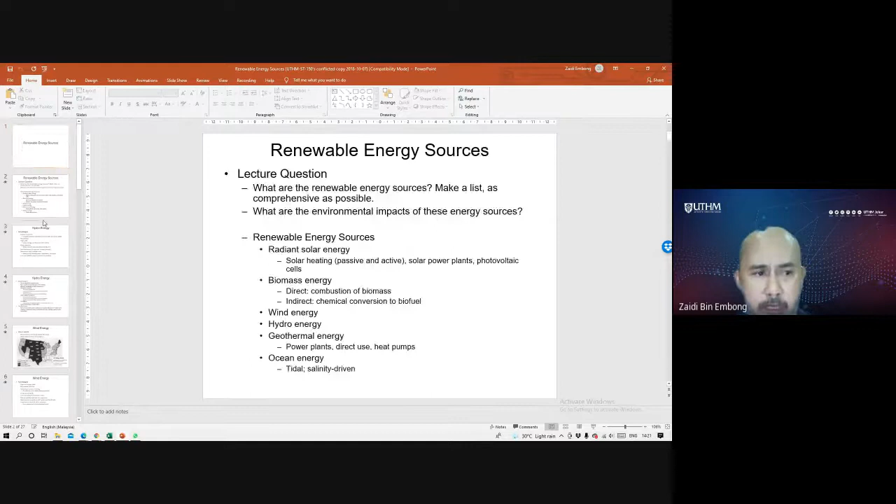Okay, all right, so look at our previous topic on renewable energy resources. I think I've explained to all of you the kinds of energy that we have, right? We have hydro energy, wind energy, and also biomass.

Some of you asked me about biomass. What is biomass? Biomass is from living forms, from dead living forms or dead biological material. So we can use it after this material decays, then we can use it as biomass. There is a term we call biofuel. For further detail, you can read the notes here.

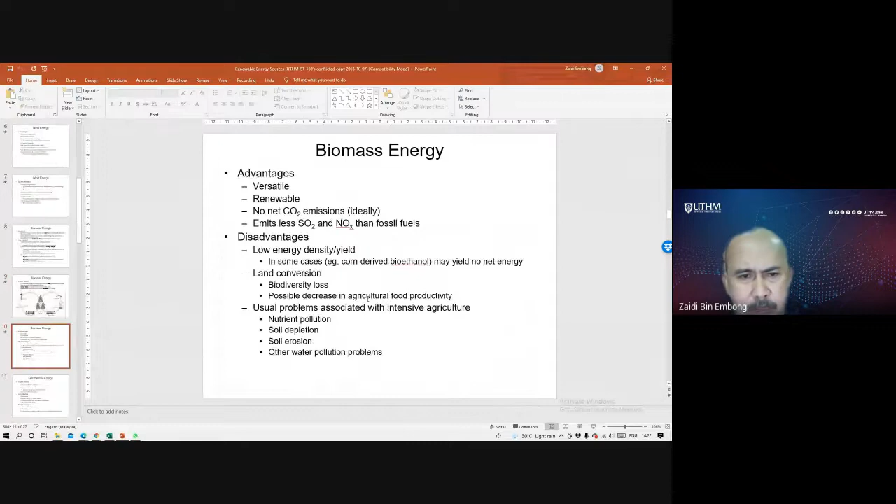I will upload the notes later on, don't worry. Okay, this is the cycle of biomass, for example, you can have a look later on. And then I've explained to you about geothermal energy before. This is solar energy, solar panel energy. And then we come to hydrogen power, all these things.

Now our major concern is, okay, we already know about all these kinds of renewable energy. When we talk about energy, we have to notice that there is non-renewable energy together with renewable energy. I explained to you the percentage of the non-renewable and renewable energy.

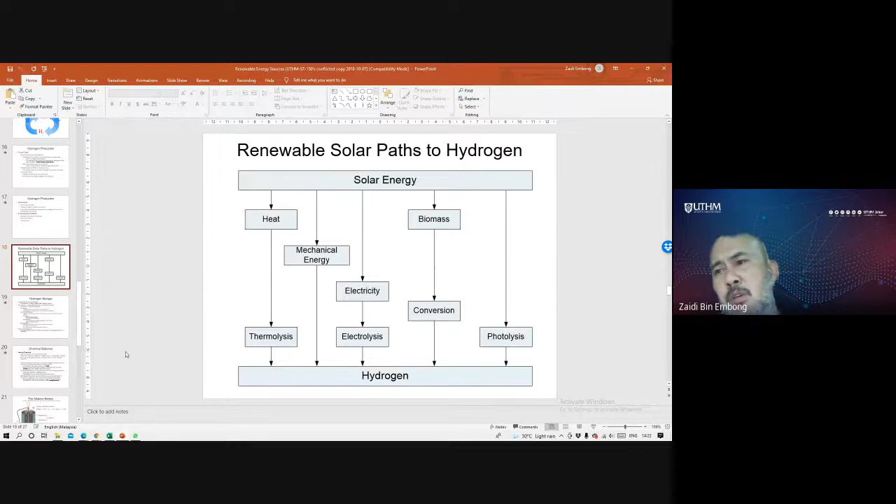Now the major concern is how can we store the energy? We have energy from all these resources, from biomass, from solar panel, from geothermal. But the major concern now is how can we store the energy? So we can store the energy using a battery.

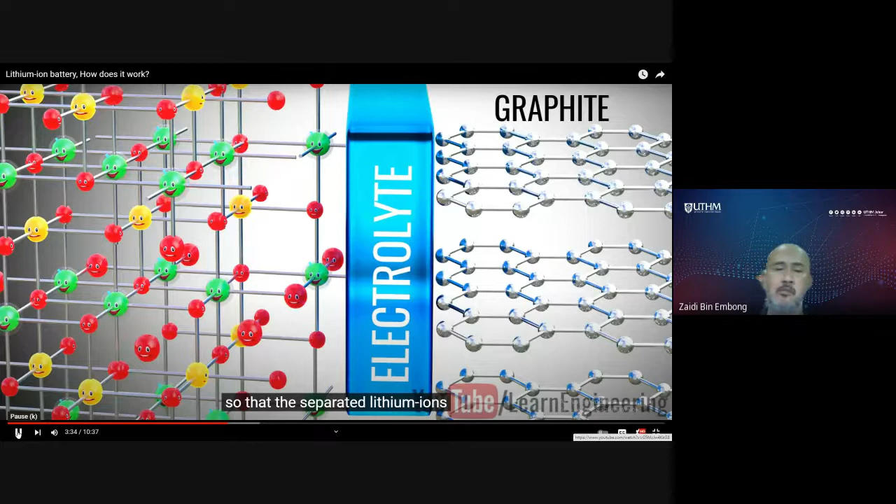Now let's see what happens when you connect a power source. Okay, this is an overview of the battery. We have the separator, and then we have this part and this part. Okay, across this arrangement.

The positive side of the power source will attract and remove electrons from the lithium atoms of the metal oxide. These electrons flow through the external circuit, since they cannot flow through the electrolyte, and reach the graphite layer. Meanwhile, the positively charged lithium ions will be attracted towards the negative terminal and will flow through the electrolyte, reaching the graphite layer space and getting trapped there.

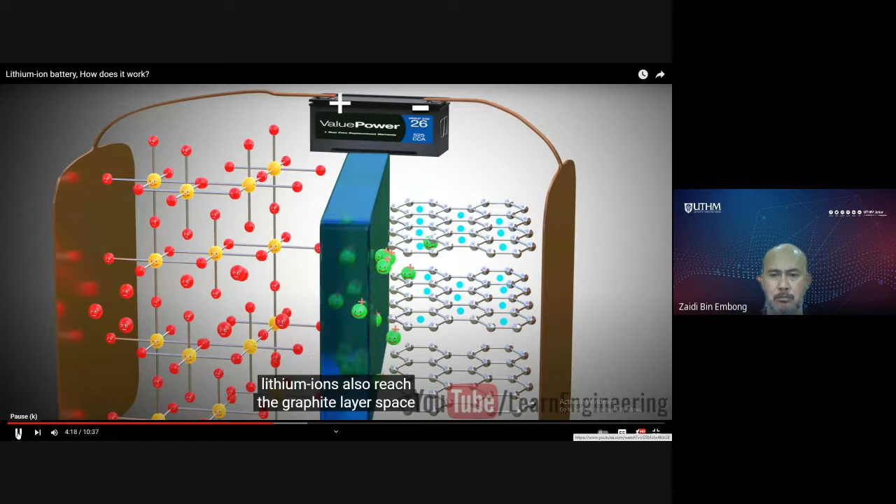Once all the lithium atoms reach the graphite sheet, the cell is fully charged. Thus we have achieved the first objective. This is condition one, after the battery is fully charged. All the positive ions from here will migrate to here, this part. So this is what you call the fully charged condition, which is when the lithium ions and electrons are detached from the metal oxide.

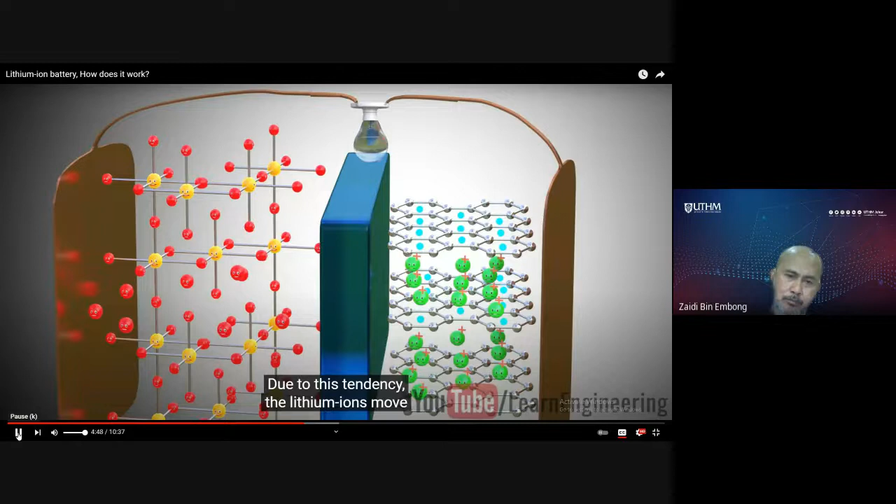As discussed, this is an unstable state, as if being perched on top of a hill. As soon as the power source is removed and a load is connected, the lithium ions want to go back to their stable state as part of the metal oxide. Due to this tendency, the lithium ions move through the electrolyte and electrons via the load, just like sliding down a hill. Thus we get an electrical current through the load.

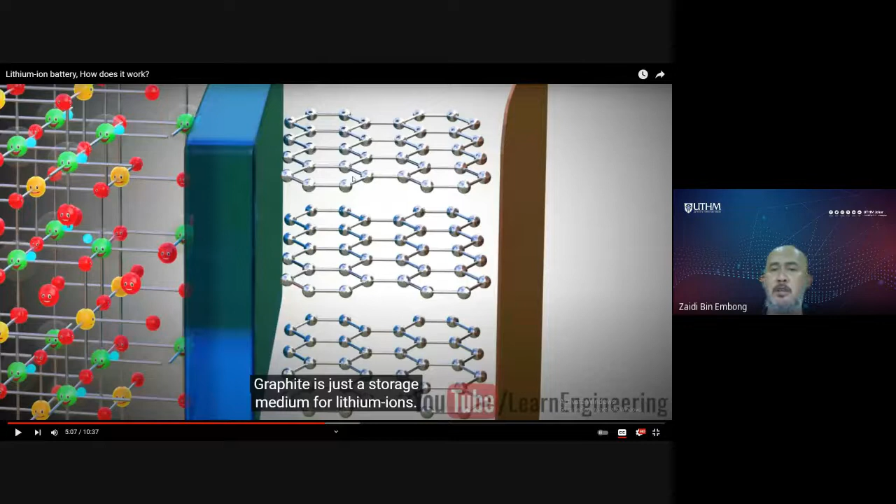Please note that graphite does not have a role in the chemical reaction of the lithium ion cells. Graphite is just a storage medium for lithium ions. What is the function of graphite? Graphite is there in order to store, the medium of lithium ion, that's it. So it means all the lithium ions will stay or remain over here, stored here.

Even though the SEI layer was an accidental discovery, with over two decades of research and development, scientists have optimized the thickness and chemistry of the SEI layer for maximum cell performance.

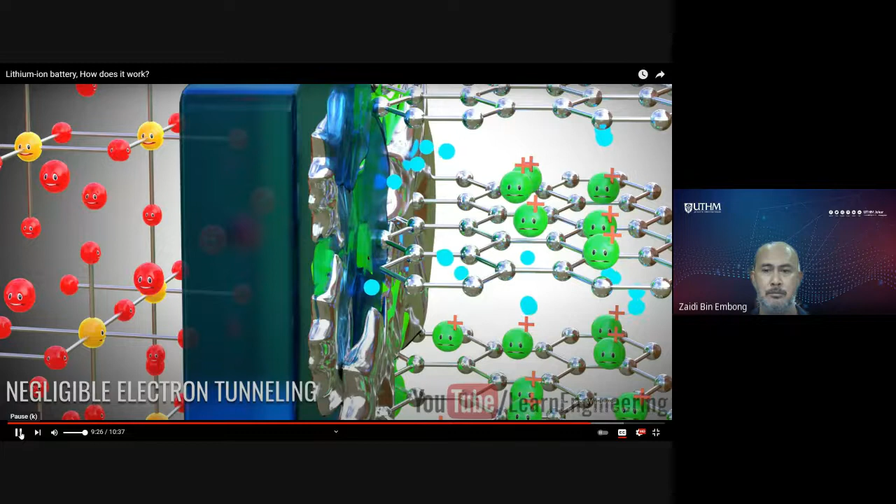The battery and so on. So at least you have some idea what this battery is all about. By that we can see many components of the battery. So therefore, today's lecture we will focus on this topic, which is the topic of energy storage.

So we're talking about thermal conductivity, the insulator application to energy conservation. In this context, in the battery, we have the conductive material, we have the insulator material. And also from the video just now, you heard the word heat. The heat is thermal. So before we start, we need to know about the energy transmission mode.

Normally the heat can be transferred in a medium, in the liquid medium, solid medium, or gaseous medium. The heat can be transferred by three kinds of events, which are number one, conduction; number two, convection; and the last one, radiation. Or maybe a combination of all three.

Conduction is normally when there is energy transfer, heat transfer, in solid material. Convection is normally when there is heat transfer in liquid form. For radiation, it's more related to air. Okay, right, let's look at the definition of conduction.

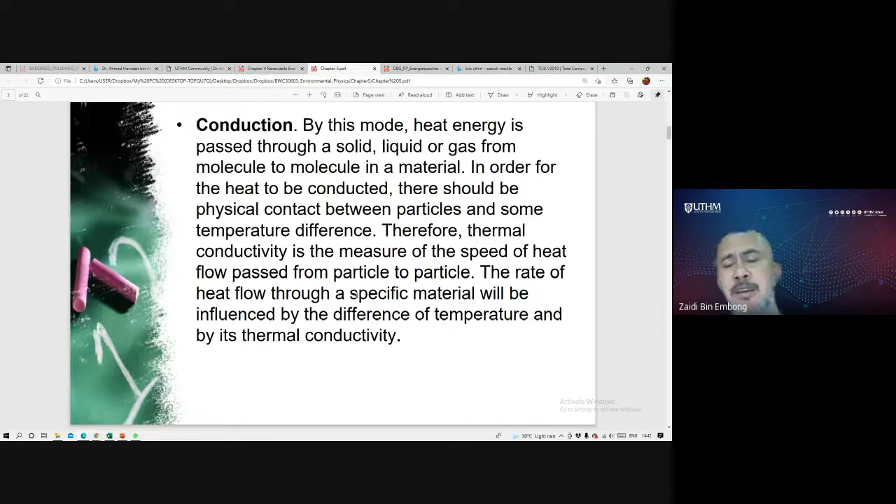So we have to look at what kind of material, sometimes we have materials like copper, zinc, etc. So the rate of the flow will depend on the heat and the material. And also there must be a difference in temperature.

So next we look at convection. Convection is more about heat transfer in the air or gases or liquid. This we call, for example, a microwave system, the microwave that you use in the kitchen. The heat transfer in the microwave system is via convection.

Last one is radiation. Radiation is more about energy transmission by the form of light, for example the heat that reaches the surface of Earth from the sun. Because we know that between the sun and Earth, we have a vacuum, the radiation, the heat from the sun reaches the surface of the Earth via irradiation, what they call electromagnetic radiation. So in this context, this kind of radiation we consider as light, because light is electromagnetic wave.

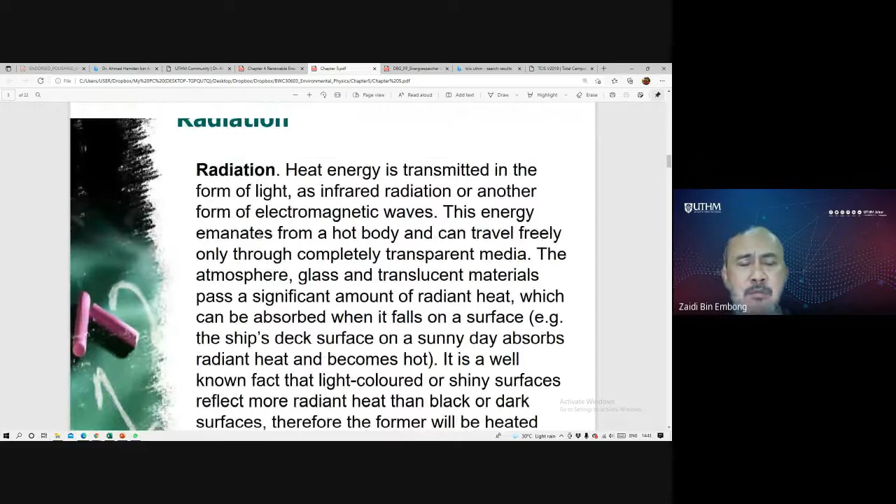Now, as we know, there are three kinds of heat transfer. Number one, conduction. Number two, convection. Last one is radiation.

Now we look at thermal conductivity and insulation. If you look at the battery system just now, we know that in the battery there must be a conductive material and there must be an insulator. So the thermal property of the insulator material or other common material is known, and can be measured - the amount of heat transmitted or flowed to any combined material can be calculated.

You can calculate it, and if you look at this, we focus on the term conductivity and insulation. Conductivity means the heat can pass through, while for insulation, the heat or the electric cannot pass through the material.

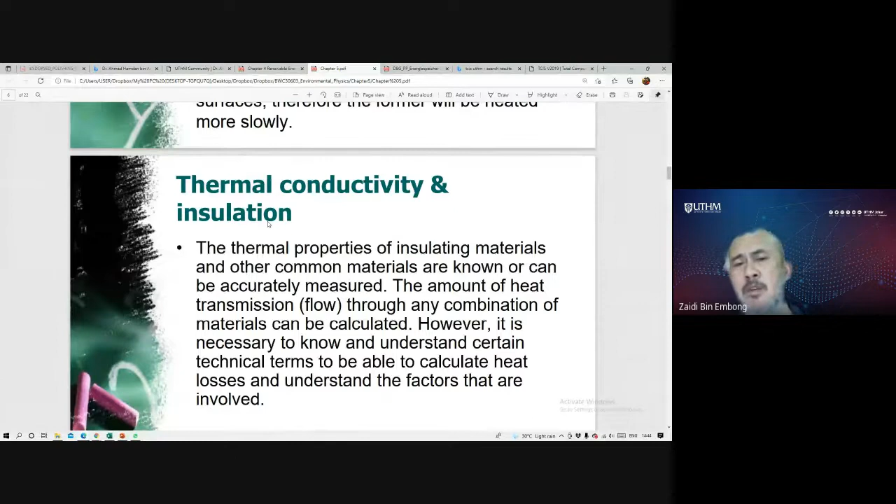So when we talk about thermal conductivity, we need to look at the term we call thermal conductivity, with the symbol K. This thermal conductivity is a property of material, or the ability of the material to conduct the heat or the electric. That's it. So this we call thermal conductivity.

If you deal with the electron, we say this is not thermal conductivity, but it's more electrical conductivity. Electrical conductivity means that the electron can be conducted via the material. But now as we mentioned, on the heat, therefore in this context we call it thermal conductivity.

So from here, for the thermal conductivity, we can use what we call Fourier law in order to calculate it. And the unit of thermal conductivity is measured in the unit of watt per Kelvin per meter, with the symbol W for watt, K-1 per Kelvin, and per meter. Per meter means this is the thickness of the material, represented by the thickness.

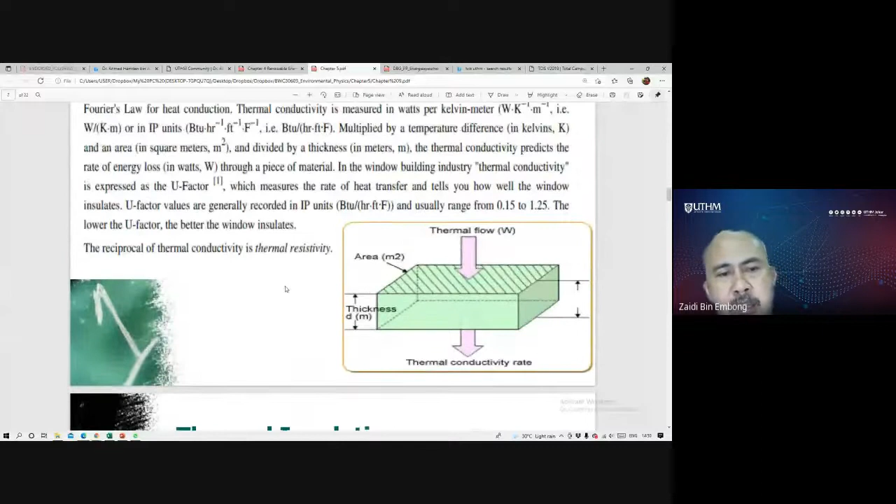Now we will talk about thermal insulator. Thermal insulator is the inverse of thermal conductivity. Thermal insulator means the reduction of heat transfer, meaning it stops or reduces the heat transfer.

So thermal insulation is the reduction of the transfer of thermal energy between objects of different temperature. We must notice the word 'different temperature' here is very important. The heat will be transferred as there is a difference in temperature — one part must be hot, another must be cold, and the objects must be in contact with each other, what we call thermal contact. So when two materials with different temperature are in contact, there will be a heat transfer, occurring from the hot area to the cold area, and at the end we have what we call thermal equilibrium.

Thermal equilibrium. So in this context, thermal insulator is also very important in order to avoid overheating. For example, look at the car engine — there must be a thermal insulator. That's why if you open the car boot and look at the engine, you can see some parts are metal, some parts are made from ceramic. Ceramic is a thermal insulator.

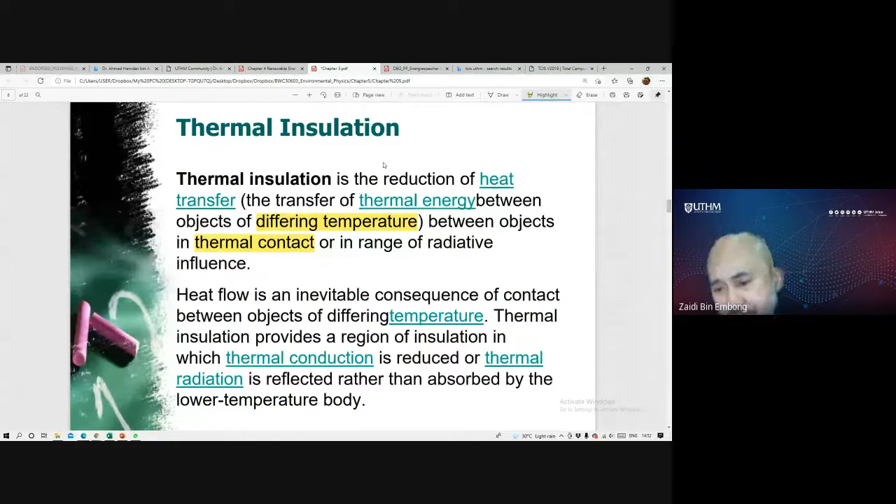When you talk about the insulator, insulating capability — this insulator is also very important in order to store energy. It's not only to avoid overheating, but the insulator is also capable of storing energy. I will explain to you later what it means by insulating capability or storing energy.

The insulating capability of the material is measured with the thermal conductivity, with the symbol K. Low thermal conductivity is equivalent to high insulation. This word is very important — don't ever confuse the term low thermal conductivity. It means that if the material has a very low conductivity, it has higher insulating capability.

Higher insulating means lower thermal conductivity. If you have high thermal conductivity, you have low insulating - it's reverse order. This word is very important: low thermal conductivity is equal to high insulating. Insulating here means represented by the value of R, the R value.

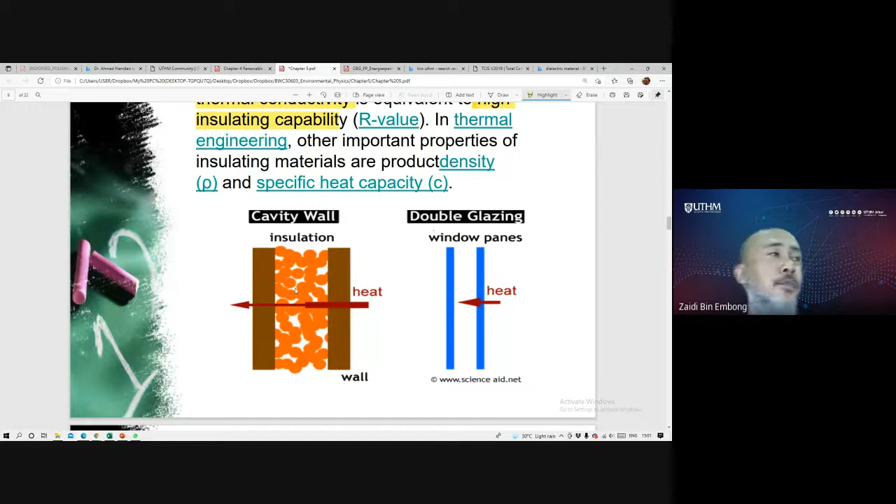The heat is also energy. That's why either it is thermal conductivity or electrical conductivity. But in our discussion here, we are concerned with thermal conductivity. Now this is an example, the double glazing.

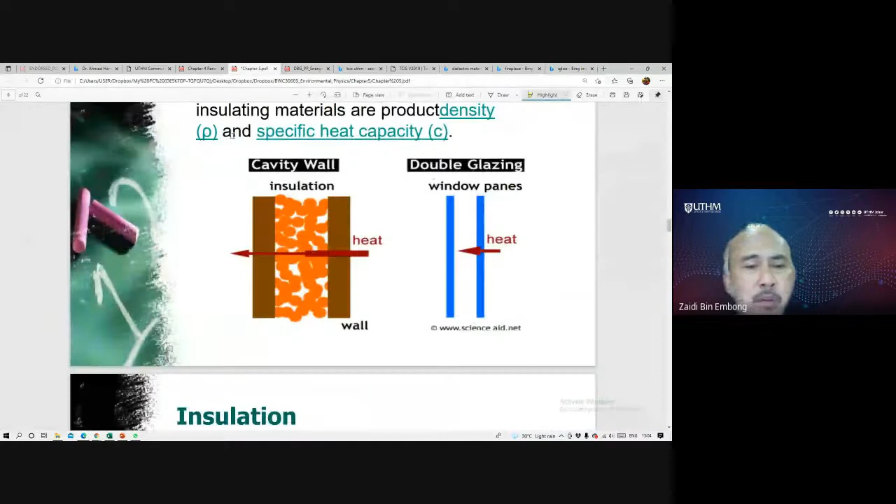Now we go to the next one: insulator. Insulator is very important in this context. The keyword here is low thermal conductivity, high insulator capability. Insulation means the material will not let heat or electric charge pass through it.

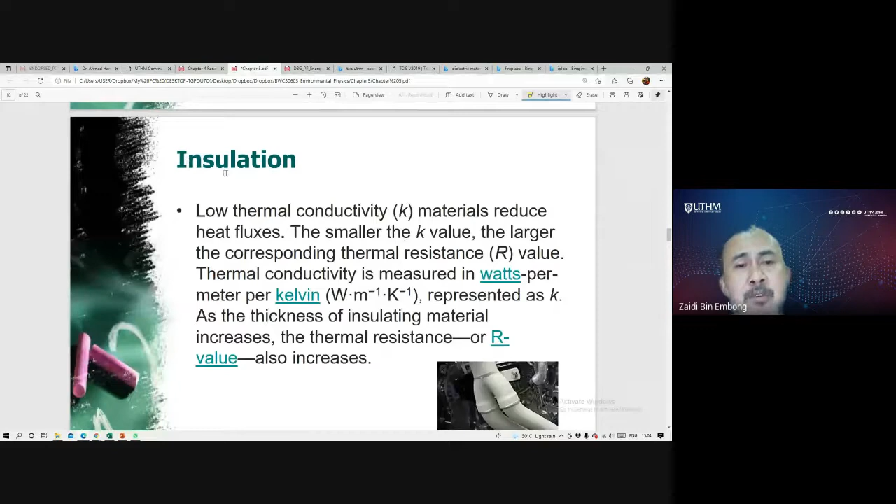If you look at the car exhaust part, for example, some part of it is covered by ceramic. The white colored part is a ceramic material.

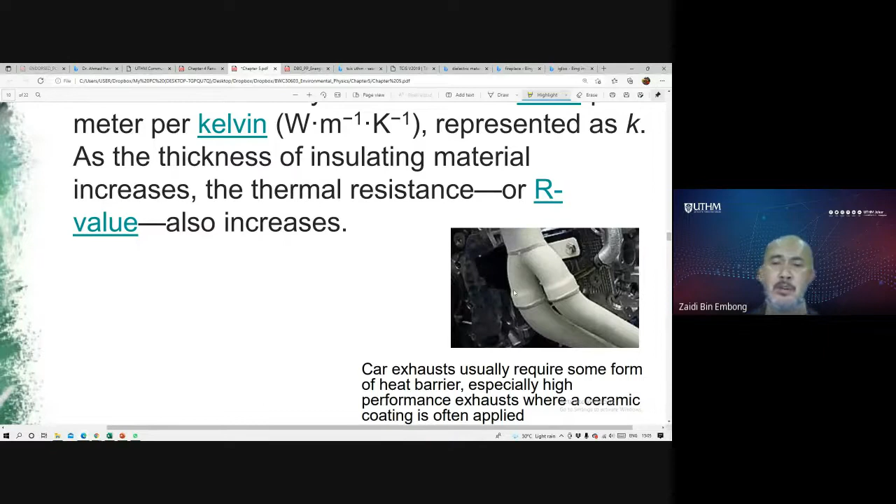You see the car engine - once the engine operates, the body of the engine becomes very hot. So in order to prevent the engine from contact with the car exhaust, we need to put an insulator, the white colored part. If there is vibration in the engine, the exhaust could vibrate and heat up with the body of the engine, and then the heat from the engine would be transferred to the car exhaust. In order to prevent this, we have to put a separator, what we call the insulator. Low thermal conductivity.

Insulator means low thermal conductivity, or maybe low electrical conductivity, which helps reduce the flux heat. The small k value - if the thermal conductivity has a small value, it means the thermal resistivity will be very high. In order to have higher thermal resistivity values of material, we need a smaller k value. So the property of conductivity must be as low as possible in order to have higher thermal resistivity. The thermal resistivity is measured using this unit, and the reverse order of the value is known as the R value.

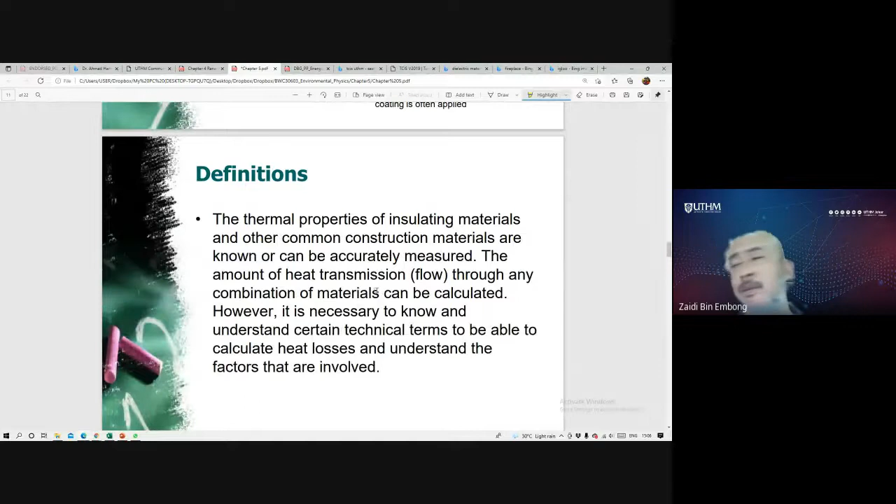Okay, some definitions. When we talk about heat, there are some parameters related to it. Number one, we have heat energy. What is heat energy? It's 1 kilocalorie, which is equivalent to 1,000 calories, or equivalent to approximately 4.18 kilojoules. Or you can use the British thermal unit, which we call BTU - British thermal unit. This is one of the fundamental properties of heat, talking about how much energy, the heat, that you can have.

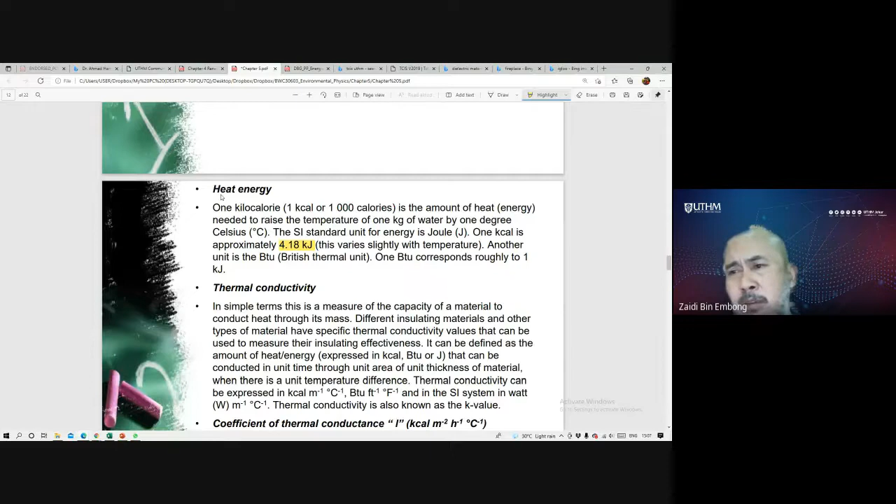Number two is thermal conductivity, as I mentioned just now. And then we have another one called thermal conductance. For thermal conductance, the symbol is I. Then we have thermal resistivity - as I said, thermal resistivity is the inverse order of thermal conductivity. Then the last one we have is called thermal heat transmission.

Any questions so far? Can you understand my lecture? No, doctor, okay right.

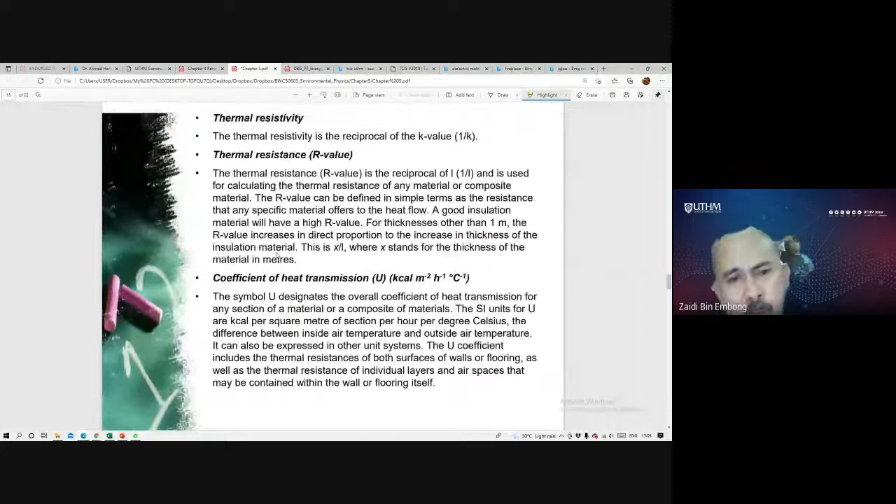All these are definitions, terms related to thermal properties. And then we have the permeance of water vapor, the resistance to water vapor. But the most important ones are the heat energy and the thermal conductivity, the coefficient of thermal conductivity.

And now, as I said, this is in the context of thermal. If you look at the context of the electrical part, it will all be different.

Now, why is insulator very important? This is the main crucial point, as I said. Insulator is very important. In a battery, insulator is very important. But if there is no insulator, the charge will be gone. That's why we need an insulator.

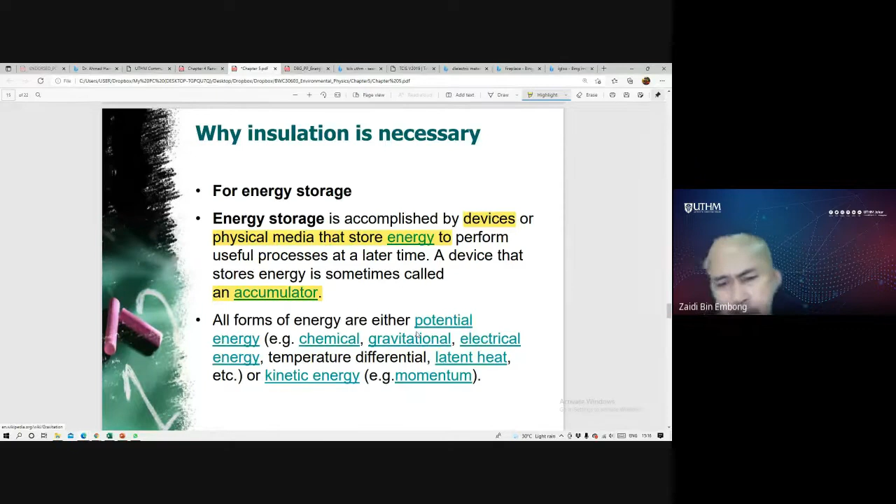When you talk about energy, there are many kinds of energy - potential energy, chemical energy, and so on. Some technology provides only short-term energy storage, and some other technology can be very long-term, like power to gas using hydrogen. Nowadays people talk about hydrogen technology, methane, and storage of heat and cold, and so on. It depends on the battery as well.

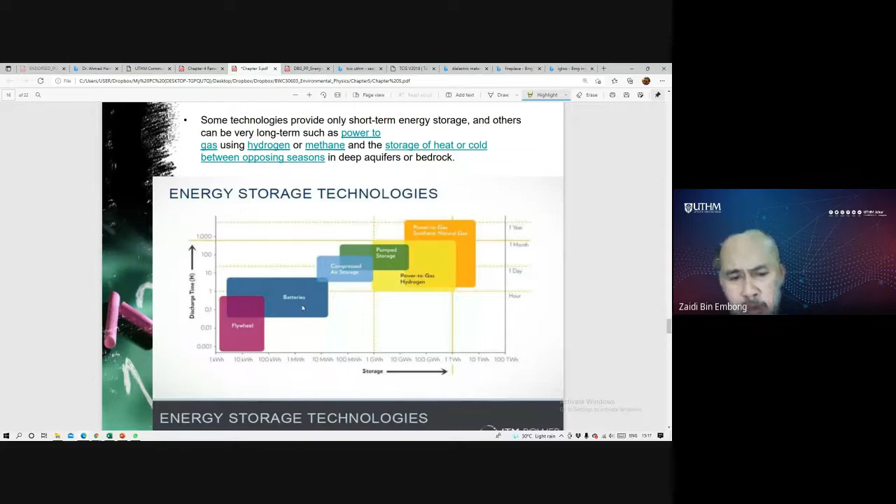If you look at the energy storage technology, you can see we have multiple techniques of energy storage. We start with flywheel - I can show you the video later on. The flywheel energy is more for mechanical energy. For mechanical, it will be more the flywheel. Then we have the battery.

The flywheel can store in this range up to this range. For the battery, it can store from here to here. Even the charging time and discharge time, you can see which one is fast - discharge time increases as we move from here to here.

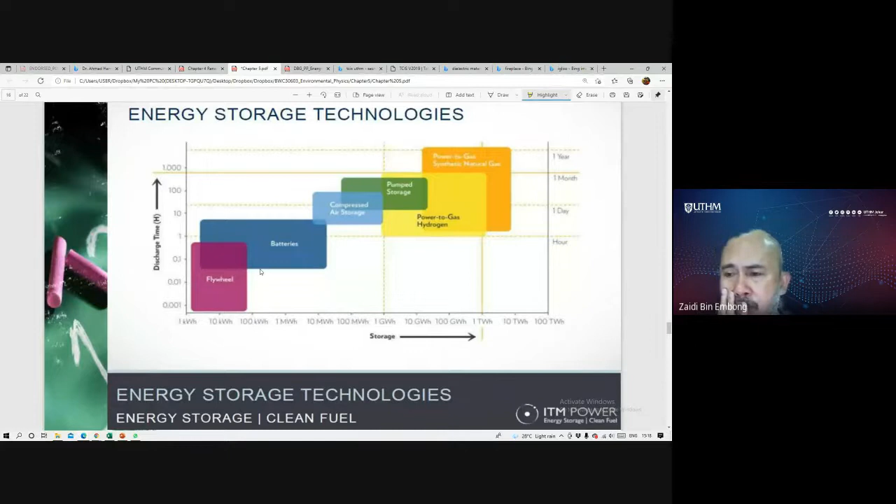Discharge - what does discharge mean? Discharge means the energy will be released very fast. So in this context, we need longer discharge time. Longer discharge time is very good.

For the battery, it can cover and store power from here to maybe some batteries can give you up to 10 megawatt hours.

Then we have the compressed air storage, and pump storage. Some of you may never have heard of this, but it's technology used in the industrial sector. For us as public people, we normally use the battery only to store energy. Then we have power to gas hydrogen, and last we have power to gas synthetic natural gases. This is more toward industrial purposes, big industrial purposes.

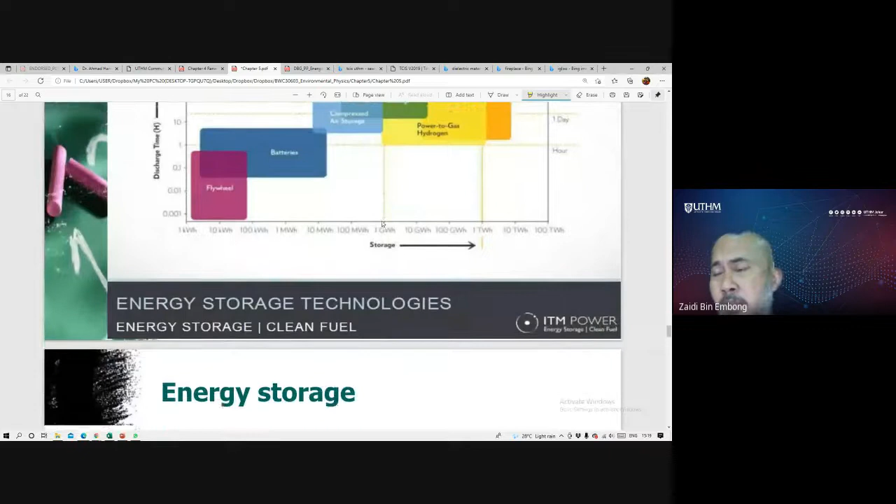Now imagine, for example in nuclear energy, how they store the energy. The electrical power generated from the nuclear energy, how is it transferred from the reactor to the resident house, for example? There must be cable, power supply cable, and also there must be a transformer. All the electrical power we have, we cannot use all of it, otherwise we will burn your house. That's why we need a transformer.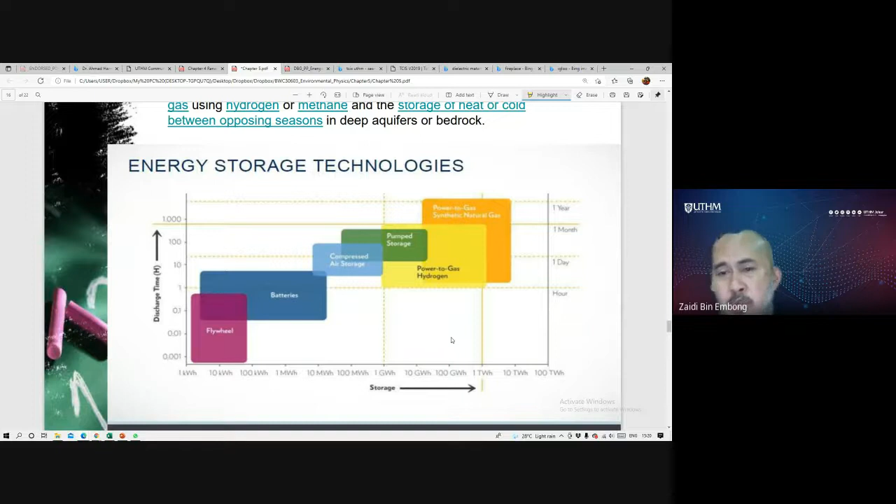A transformer - when I say transformer, it's not the Optimus Prime in the Transformer movie, not that one. I'm talking about the device that we use to change the voltage, to reduce the voltage.

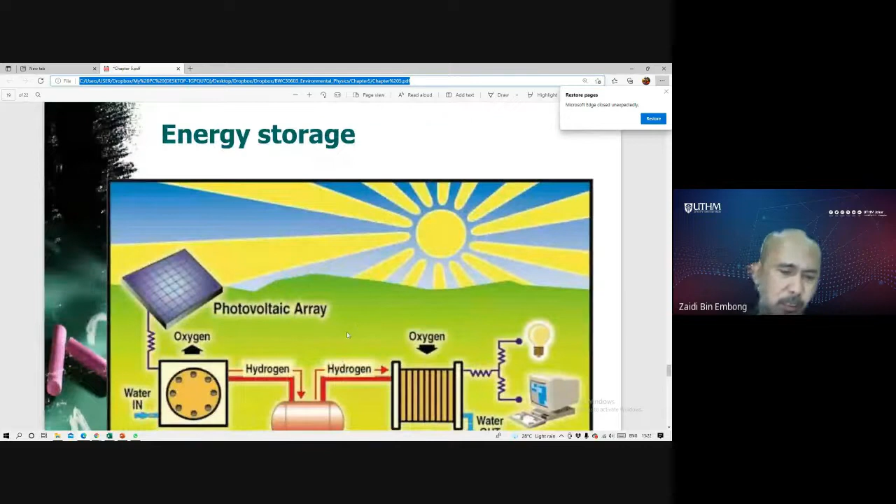If you look at the solar panel system, I will explain this in detail later. This is a solar photovoltaic array. We have direct sunlight interacting with the solar panel, producing electrons which flow, and then we have the current here. And then from this electron we operate this electrolyzer.

From here we can combine - this is the hybrid, one example of hybrid technology. So from solar, combined with this, we induce the hydrogen power, and from hydrogen power we use the hydrogen to have the fuel power here, the fuel cell. From here we have the heat, and afterward we can create the current.

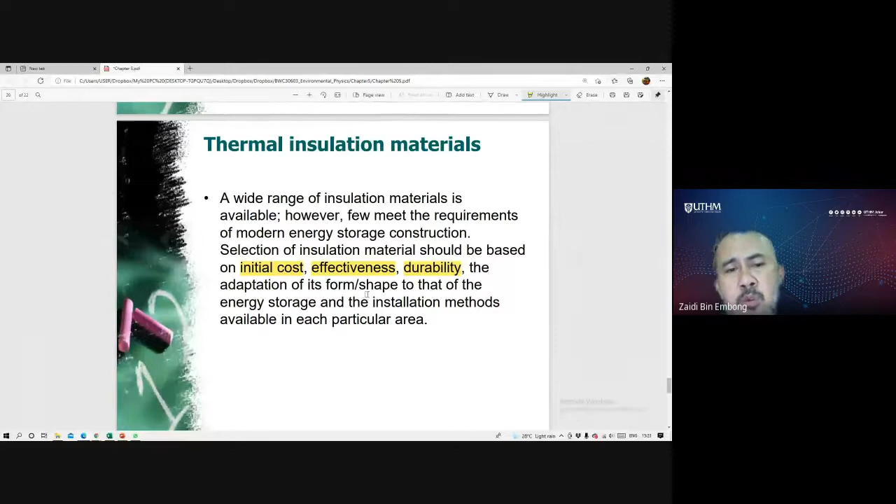Thermal insulator material - a wide range of insulator material is available, however few meet the requirements for modern energy storage construction. So in this context we need to select the proper insulator material. In order to select the suitable material, we need to consider the cost, the effectiveness, the durability, etc. This is the criteria we need to consider in order to select what kind of material to use as insulator material.

In this context, when we talk about insulator, we have varieties of insulator material. We have this polyethylene board, and up to here the fiberglass, and then we have rock wool, and sawdust - sawdust is from wood - and then we have air space. Now you can see there is a difference in the R value here.

Which one is the best insulator? The best insulator with higher R value or lower R value? Which one? It must be higher R value. Higher R value means it can become a good insulator material. And some other examples are this one.

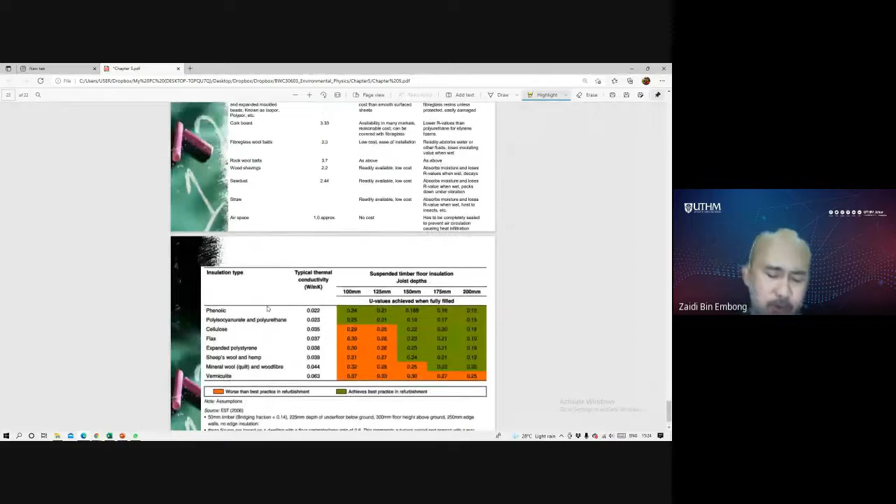As I said, the R value of the material must be very high. If the R value is very high, that means they will be good insulator material. Now if you compare several materials like this, from phenolic, cellulose, flax, up to here, this is the thermal conductivity. So from here, we can see if the thermal conductivity is very high, the insulator will be lower. In order to have good insulator material, we need material with lower thermal conductivity.

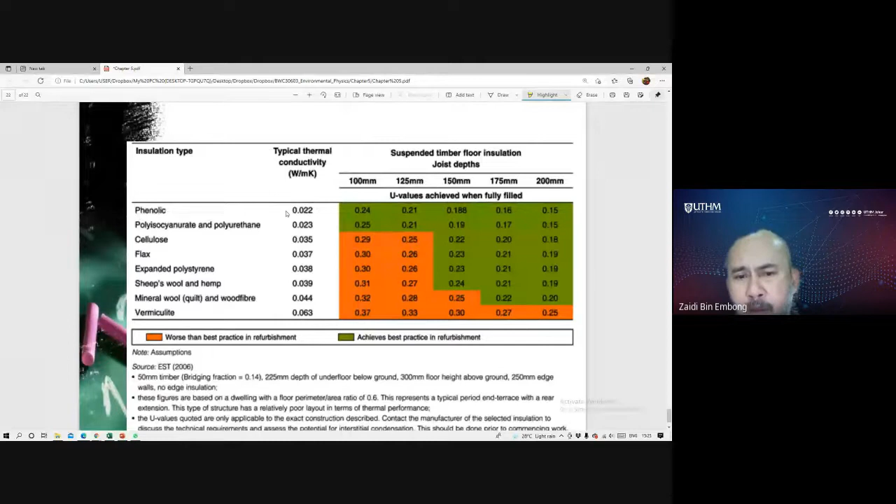So from here you can choose which one is the good insulator. The good insulator is this material, phenolic, which is 0.022 watts per meter per Kelvin. Why? Because it has lower thermal conductivity. Lower thermal conductivity means the heat cannot easily pass through. It can pass through, but it's a bit delayed compared to others.

It's not only dependent on the material. Let's look at only one material, phenolic here, the best insulator. You need to consider the thickness, the depth as well. If the thickness is about 100 millimeters, and then 125 millimeters up to 200 millimeters, you see the U value here is different.

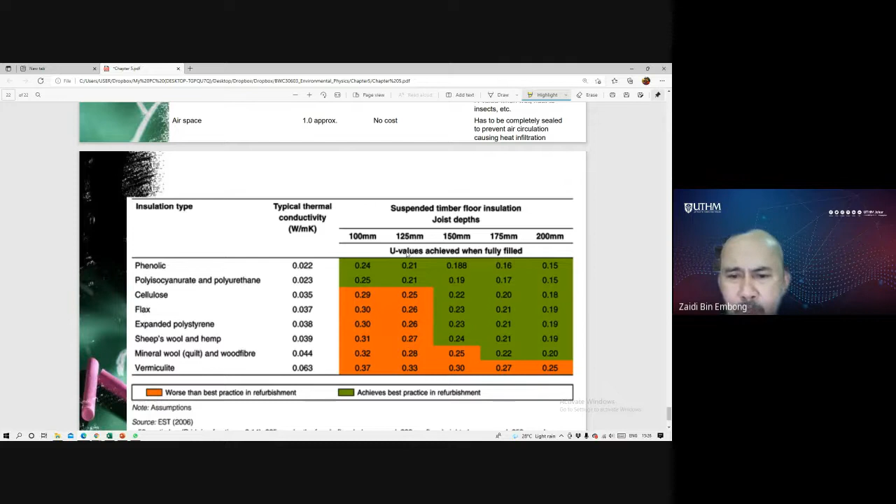What is the U value? You have to look at this one. The U value is the coefficient of heat transmission. Okay, this is the U value. Now from here, you have what you just saw, the U value.

So that means if you have a thicker one, now which one is the best? Starting from 0.24 up to here, the best one is this one. Thicker is a better insulator. Okay?

Now the analogy is very simple. You compare between a thin layer of blanket and a very thick one. If you have a thick layer of blanket, when you are getting cold, you need a very thick blanket to prevent your body from being very cold. Right, so you need a thick blanket.

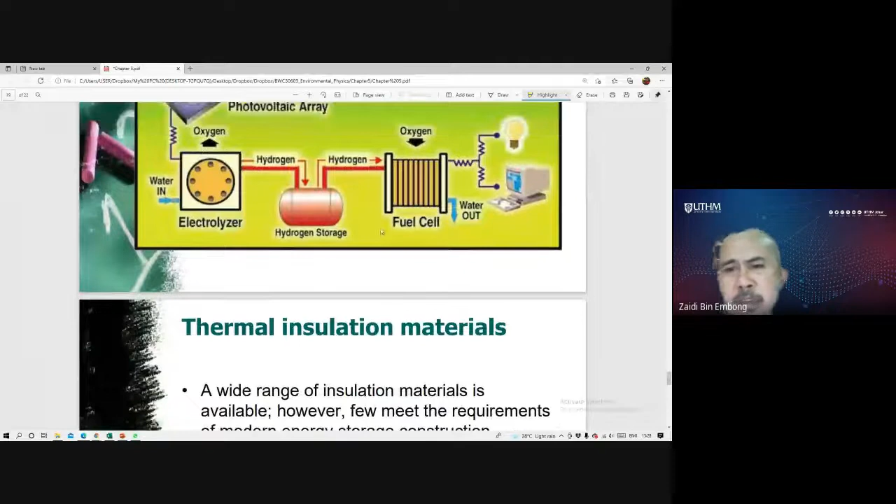So in this context, the best insulator is phenolic with a thickness of 200 millimeters, because we need very low thermal conductivity, meaning it can store the energy. So in this lesson, what we need to notice is that insulator is very important.

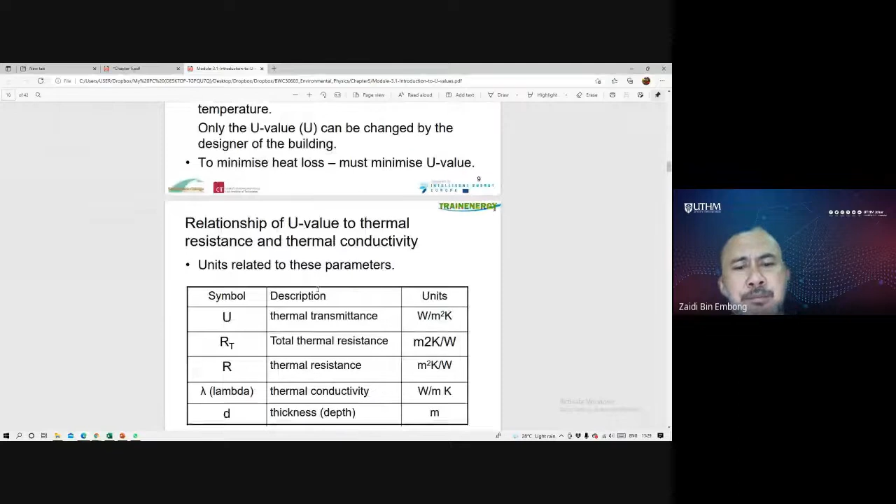Insulator is very important to store the energy. Now at least we have some basic concept on this. If you look at this one, I have some other notes here. Later, this is the insulator, and this is one, and then we have, talking about the U value, there is another one, as I mentioned just now, hot to cold. This is all the U value. And then they have some more examples here, U, R value and so on, up to here. I'll pass through this and upload it later on.

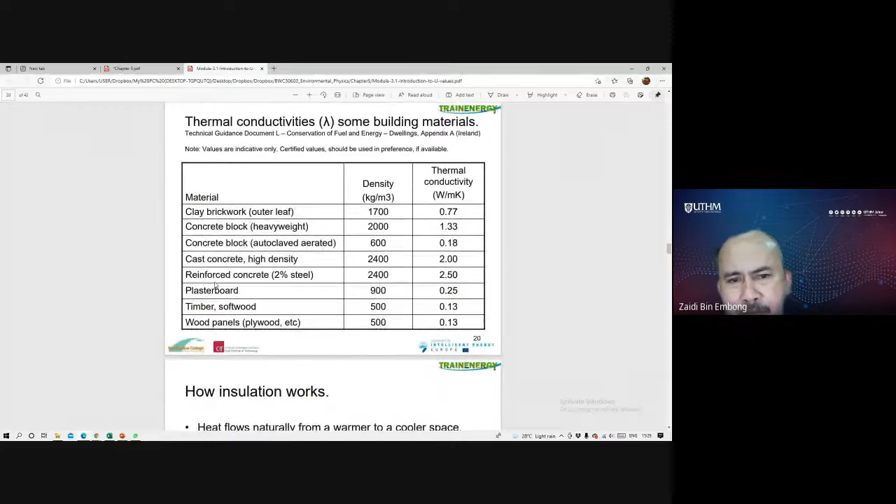I hope you can read from page 6 down to, I think, page 10 is enough. At least you know about battery technology.

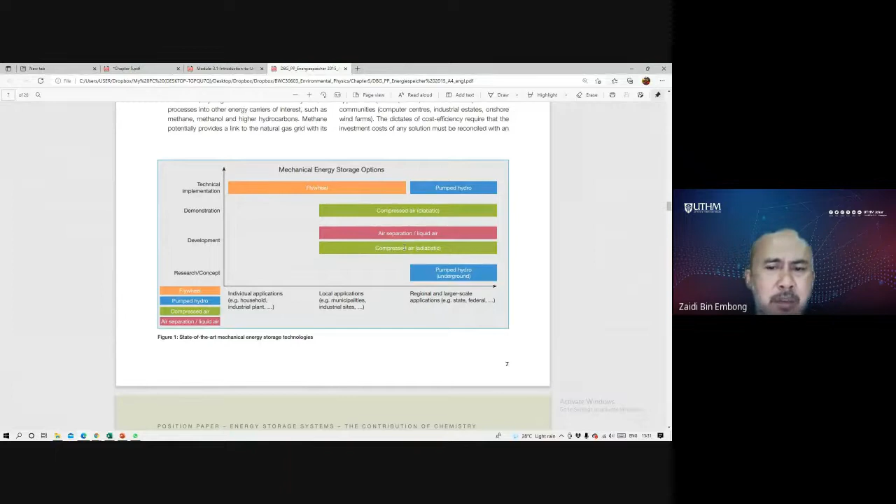Now if you look at this, this is the power storage technology. As I said just now, we have the technology of flywheel, pump hydro storage. Instead of just battery, we have many more systems. This is the energy storage technology as I mentioned. We have flywheel, pump hydro, compressed air, air separation, pump hydro. Even this is more what they call mechanical energy storage.

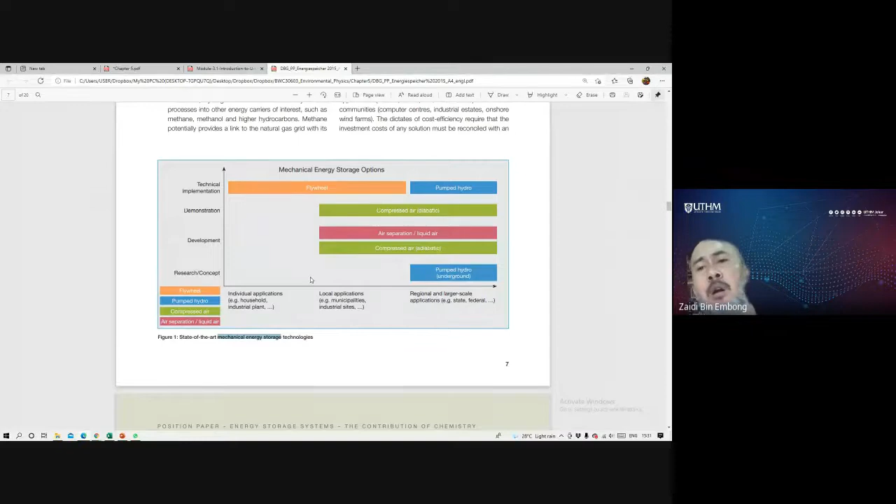Mechanical energy storage means the energy produced from mechanical sources, for example wind power. Windmill power is from mechanical to electrical. So in this context we use this concept, the flywheel. I'll show you later on.

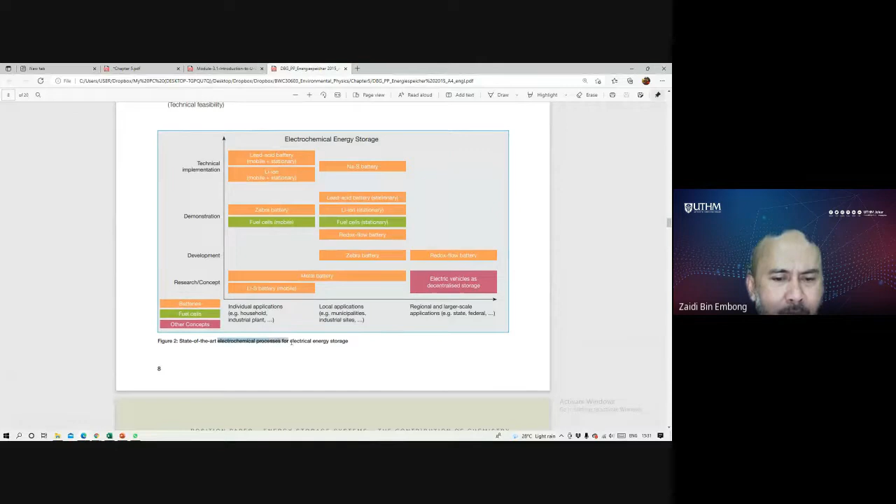Then we have electrochemical process energy storage. In this context we have many kinds of battery. We have the lead acid battery, common in cars. But with a lead acid battery you need to top it up every day, every week, every weekend, checking the battery level, the liquid electrolyte level, and pouring solution into the battery.

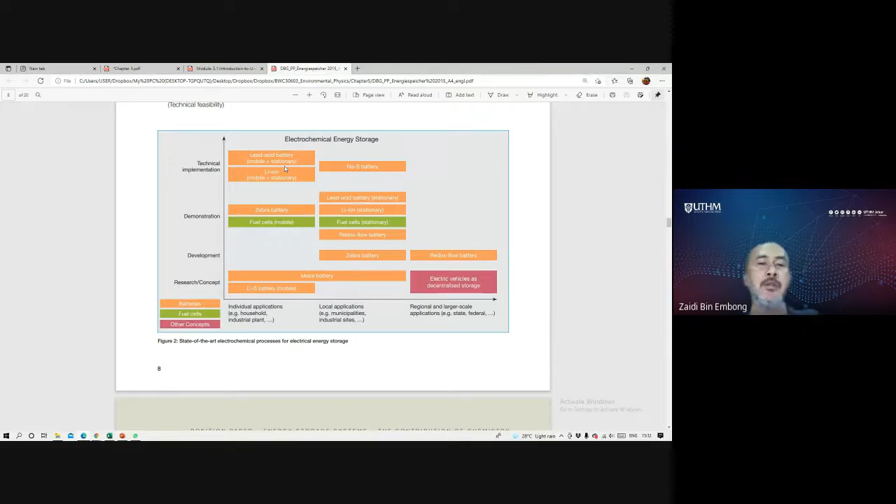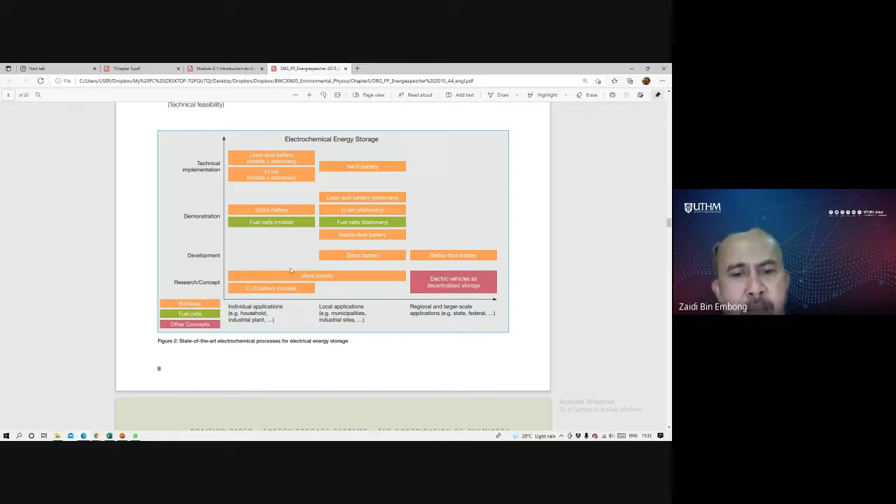And then we have the NAS battery, lead acid battery, zebra battery, fuel cell, metal battery, lithium sulfide battery, lithium sulfur battery, redox flow battery - all these technologies are considered under one roof, what they call electrochemical process energy storage.

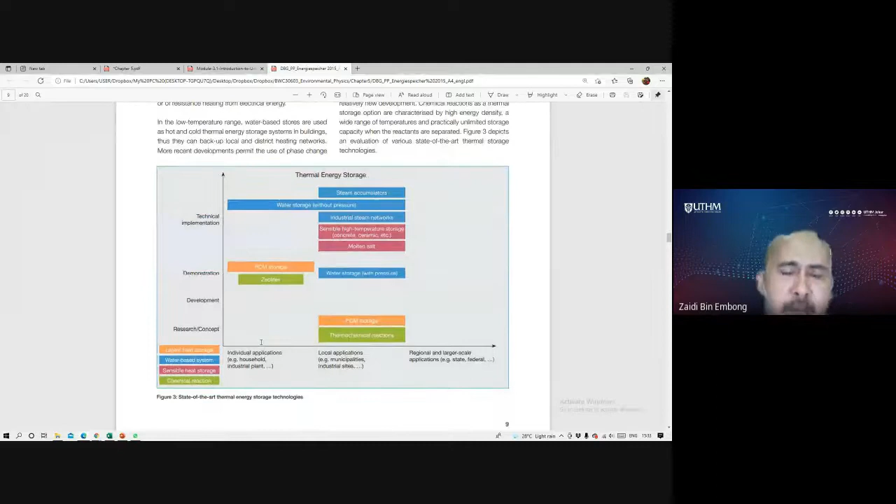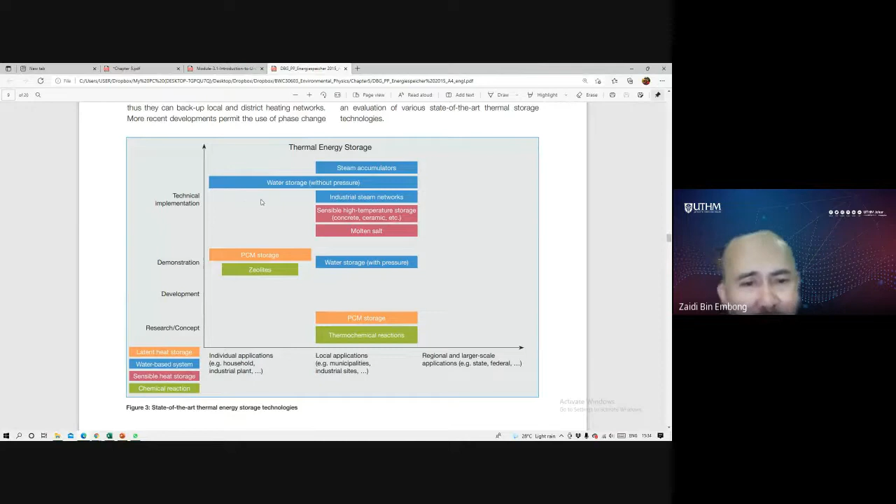And the last one is thermal energy storage. For this, insulator is very important, as I said. You need a very good insulator system to prevent heat from being released to the environment. We have zeolite, PCM storage, steam accumulator, industrial steam, and thermal chemical storage. All these technologies are under one roof of thermal energy storage system.

Up to here only. This is a comparison. This is another one, what they call chemical storage, quite similar to the previous one. So you have to read until page 11.

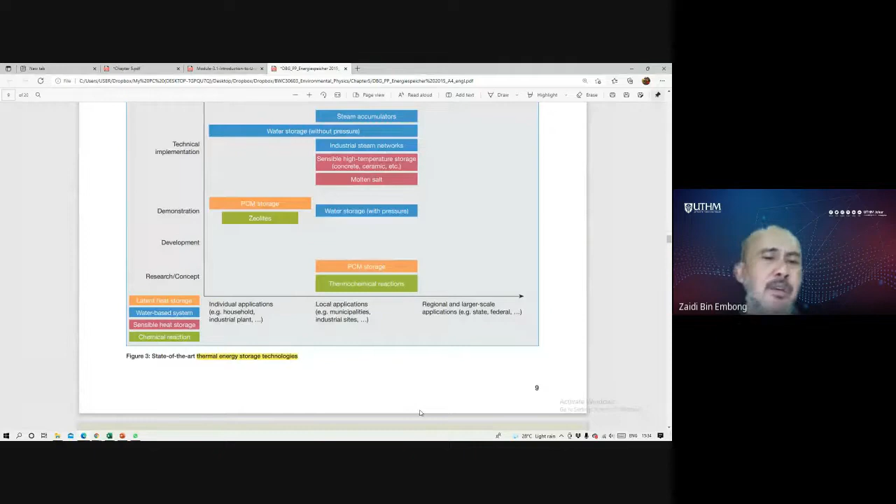As a conclusion, for energy storage we can divide it into three sections. Number one is mechanical energy storage. Second one is electrical process energy storage. And the last one is thermal energy storage.

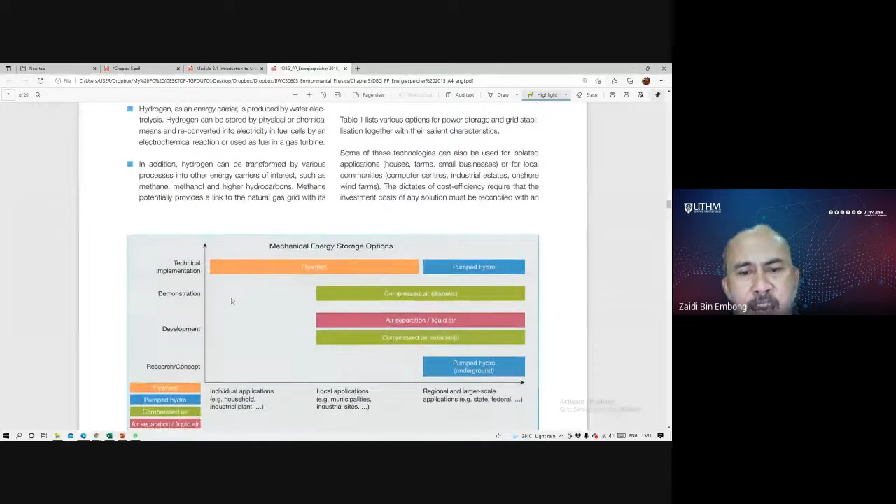Now let's have a look at flywheel energy storage. We'll look at the flywheel and how flywheel energy storage looks like. Have a look.

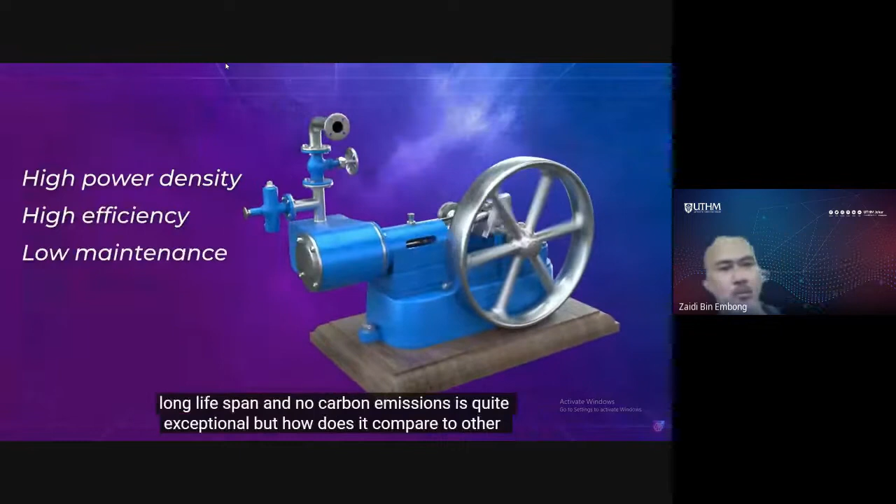A chemical battery is usually our first thought when it comes to energy storage, but another less known but promising solution, one that far predates any modern battery, is the flywheel. This relatively simple mechanical battery has high power density, high efficiency, low maintenance, long lifespan, and no carbon emissions - it's quite exceptional, a mechanical part. This is more mechanical energy storage. Flywheel stands for this wheel, so it's called flywheel.

But how does it compare to other energy storage technologies? As the world shifts from fossil fuels toward renewable energy sources such as solar and wind that aren't available 24/7, energy storage technologies play a vital role in balancing supply and demand. Lithium-ion batteries are the front runner for consumer electronics, EVs, and grid-scale energy storage, with a global market of $46 billion expected to double by 2026.

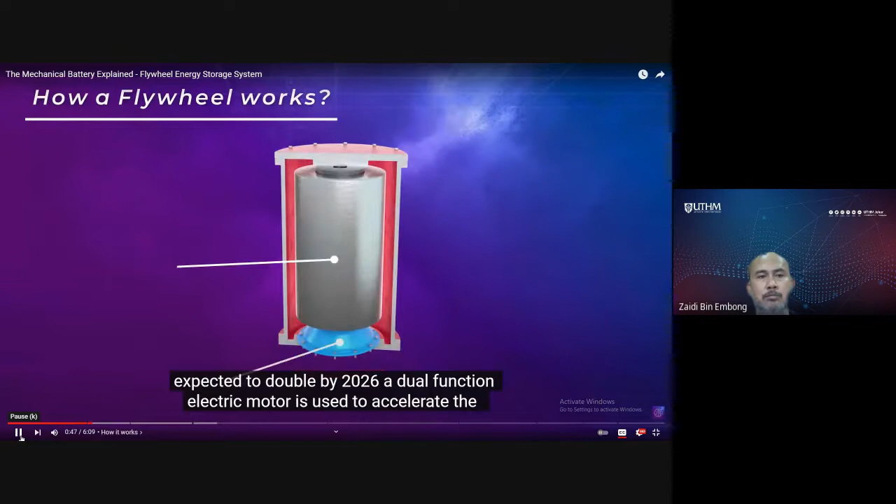A dual-function electric motor is used to accelerate the flywheel, which is a rotating mass that stores kinetic energy. The key word here for the flywheel is rotating mass - this material rotates and stores kinetic energy. This is the keyword of the flywheel.

When you have the rotating mass, what does it mean? It also relates to the concept of basic physics - inertia, Newton's first law. We have the concept of inertia, which is more related to density and also related to mass.

When the power supply is cut off and energy is needed, the motor operates like a generator, and the spinning flywheel force drives a device similar to a turbine to produce electricity, consequently slowing the rate of rotation.

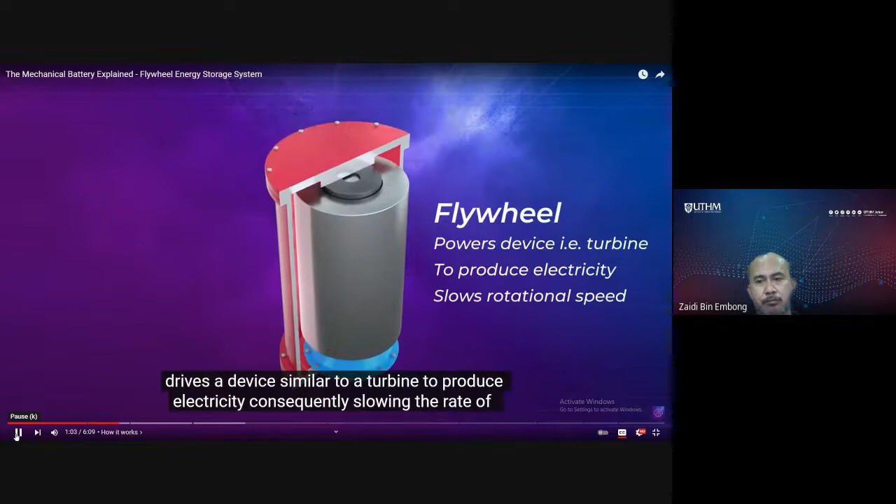A flywheel is recharged by using the motor to increase its rotational speed once again. The amount of energy that can be stored relates to the kinetic energy formula: 1/2 times I, the moment of inertia, times the angular velocity squared. The moment of inertia is related to inertia, as in Newton's first law.

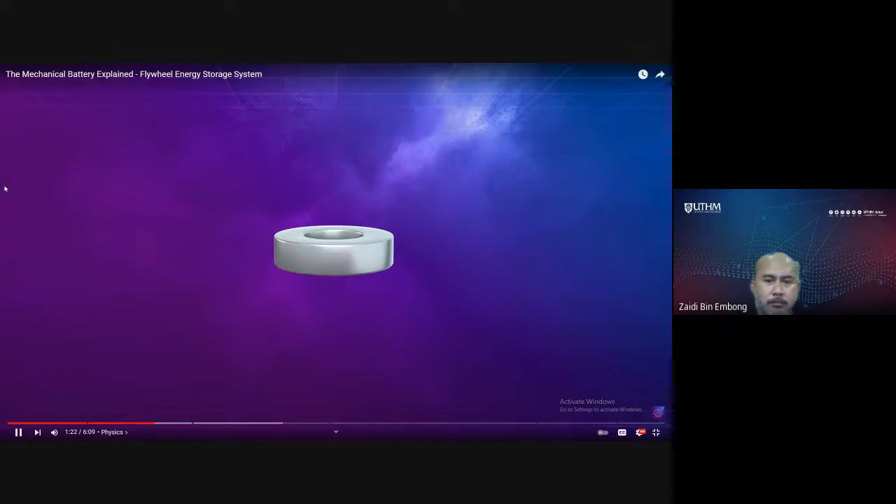The rotational energy stored is directly proportional to the moment of inertia and the square of its angular velocity. The moment of inertia depends on the mass and diameter of the flywheel. So to increase the energy stored in a flywheel, its mass or size must be increased, or the speed at which it rotates must be increased.

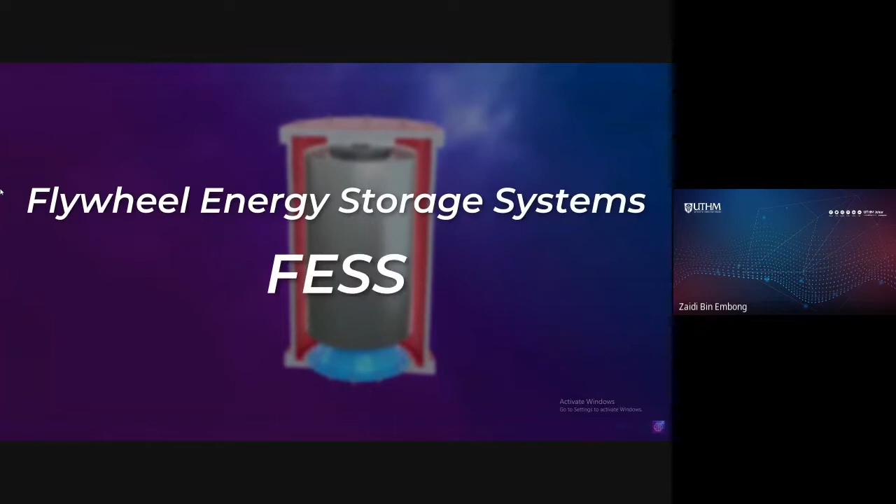The maximum operating speed of a flywheel is limited by the material strength of the flywheel rotor. Since the late 20th century, the modern flywheel, developed expressly for energy storage and known as Flywheel Energy Storage Systems, or FESS, has been mostly used. Flywheel shapes range from the wagon wheel configuration found in stationary steam engines to the mass-produced discs found in internal combustion engines.

Flywheels are mostly designed in two shapes. Solid discs or long cylinders are usually constructed from isotropic materials such as steel, while hollow cylinders or tubes are constructed from carbon and glass fiber reinforced composites. Bearings support the flywheel rotor while allowing it to spin at high velocities.

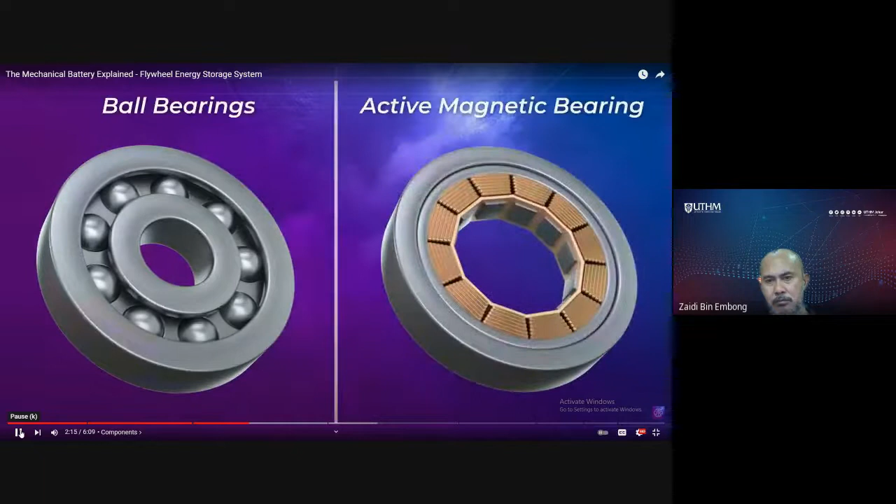Ball bearings and active magnetic bearings are the two most common bearing types used in flywheel systems. Ball bearings are a simple, more common, and less expensive alternative to active magnetic bearings, but are challenged by the life and load requirements.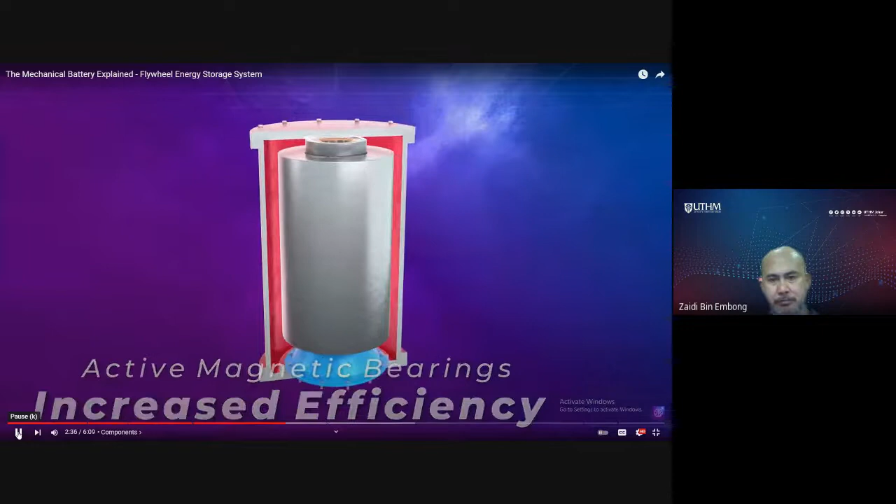You see the word levitate - what does levitate mean? Floating. You should note the word levitate there. Active magnetic bearings levitate and are free from contact, therefore more related to superconductor material - free from wear and also helping increase efficiency due to minimal losses.

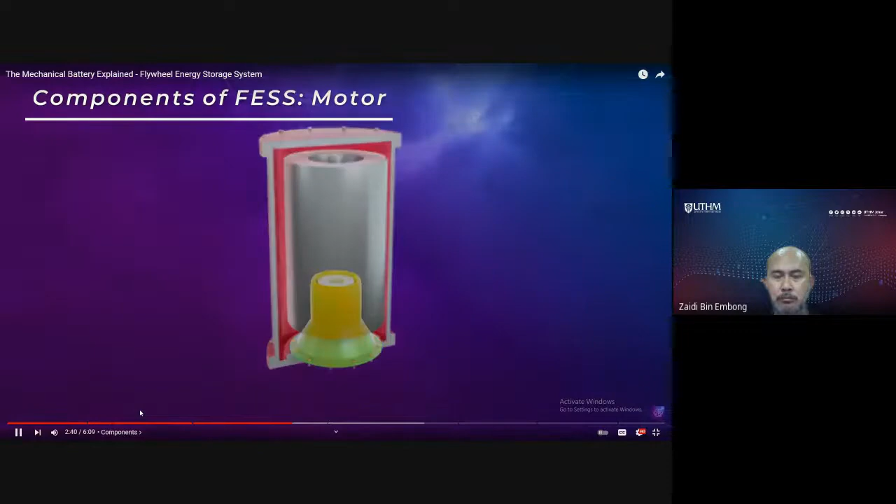The flywheel is charged and discharged by a double function motor generator, usually attached to the rotor by a hub and a shaft. A wide variety of motor types have been deployed: synchronous reluctance, induction, as well as many types of permanent magnet machines. FESS is housed in a vacuum enclosure to reduce aerodynamic drag, with the battery being the flywheel.

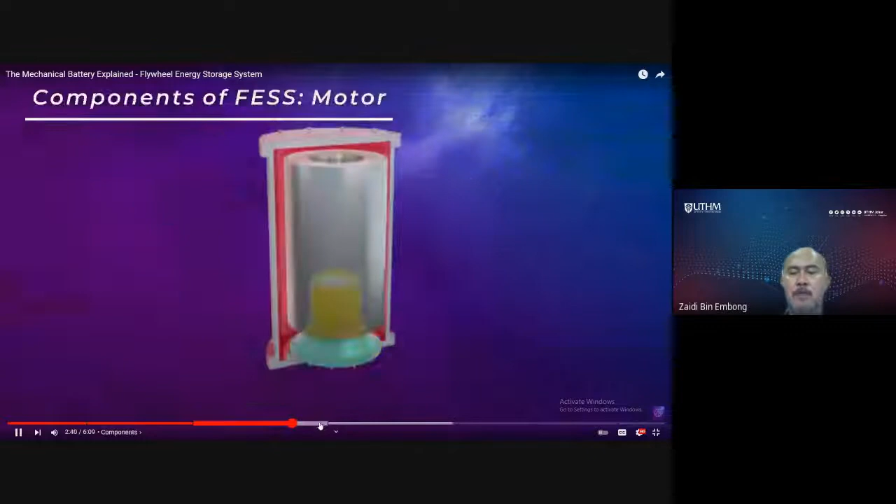In this context, you have to use a vacuum. The generator enclosure reduces aerodynamic drag - they use a vacuum here in order to prevent friction, which is why the vacuum is used, with an energy efficiency that can be as high as 90 percent.

So if you enclose this one in a vacuum, you will have a very good efficiency, because as I mentioned in my first lecture in chapter 1, eta represents the efficiency of the energy, the ratio between input and output. So in order to have a very good efficiency, the value must be very close to 100%. If you have 90%, that is very good efficiency.

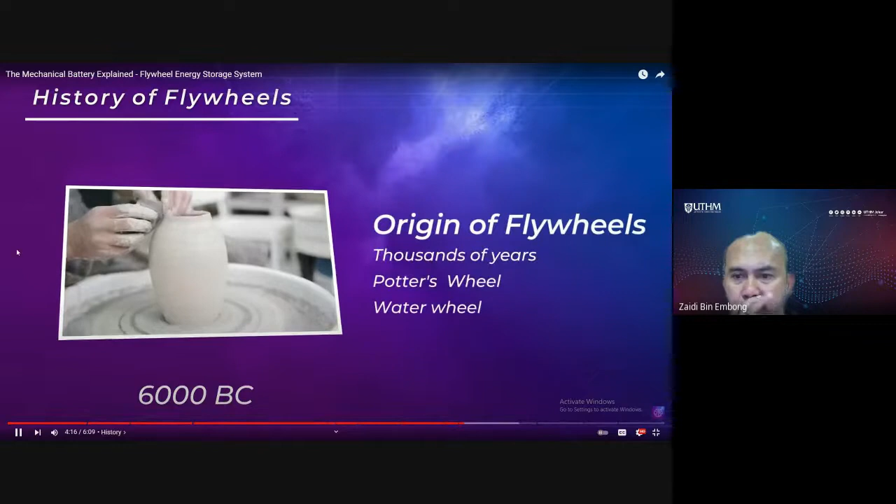Stations utilize flywheels as control moment gyros to stabilize and orientate the spacecraft. Flywheels have been used for thousands of years, originating in the potter's wheel and water wheels, with the best known flywheels dating from the Industrial Revolution, where they were used in steam engines. Modern flywheels have been used in gyrobuses since the 1950s, where the flywheel is mounted between the rear engine of the bus and the rear axle. Whenever the bus brakes, the flywheel works as a regenerative brake, absorbing kinetic energy and slowing the vehicle down.

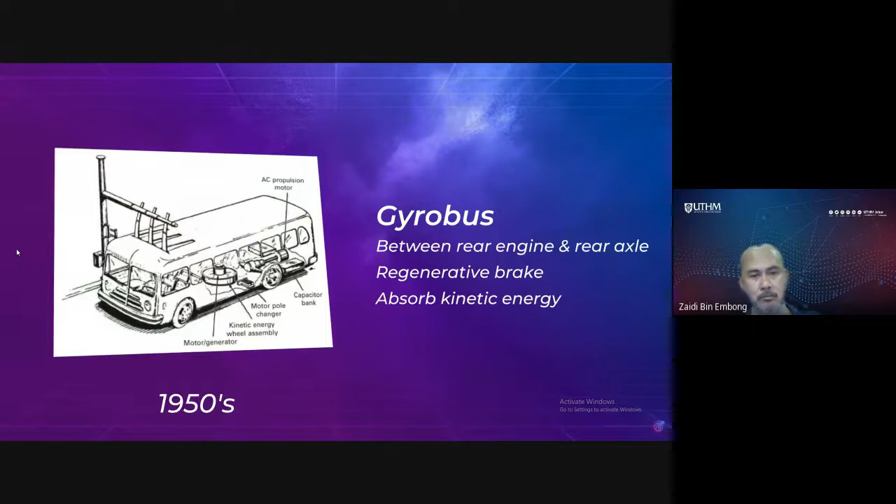In the last few years, Formula One race cars have been using flywheels to provide a boost. If you're a Formula One fan, there's the term KERS. KERS stands for Kinetic Energy Recovery System.

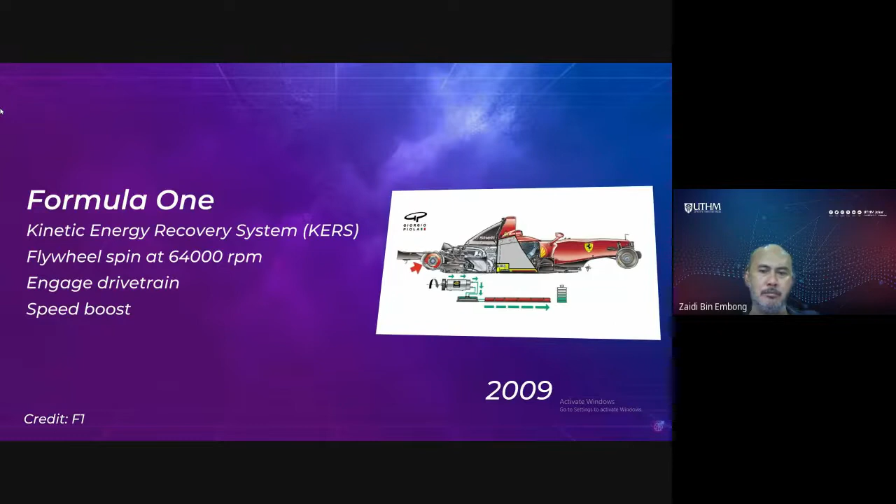In the last few years, Formula One race cars have been using flywheels to provide a power boost via KERS, which is a flywheel spinning at 64,000 RPM that absorbs energy that would be lost as heat during braking. When activated, the flywheel temporarily engages with the car's drivetrain and gives a brief speed boost.

Flywheels still need to overcome a significant barrier before they can solve the task of storing renewable energy. Although flywheels have high efficiency and very short startup time, they are still very expensive compared to other alternatives like lithium-ion batteries. With the continuous decline of lithium-ion battery prices, it will be difficult to utilize FESS as a viable energy storage solution except for very specific applications.

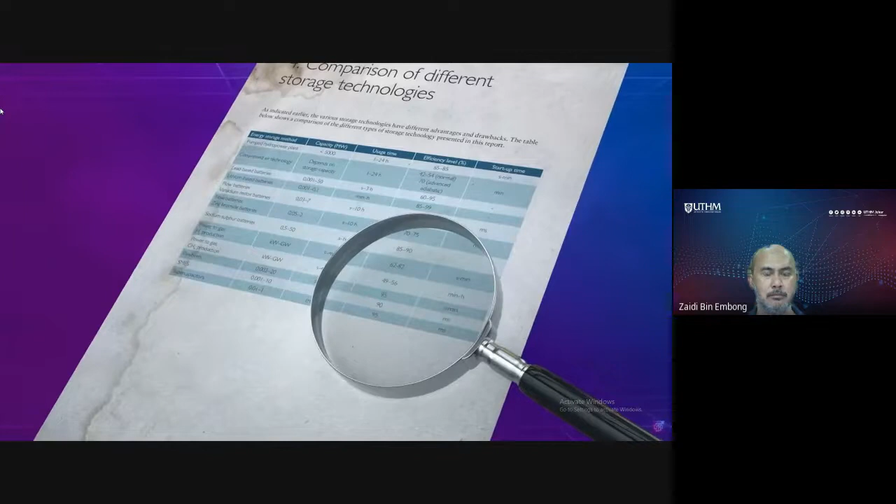Some developments that can significantly enhance flywheel performance and make it more competitive with batteries are the development of new materials with high strength and low density, and superconducting bearings, which can reduce friction loss since they enable increased rotating speeds and decrease self-discharge rates. As electrically connected energy storage systems, flywheels must compete with batteries and ultracapacitors on the basis of cost.